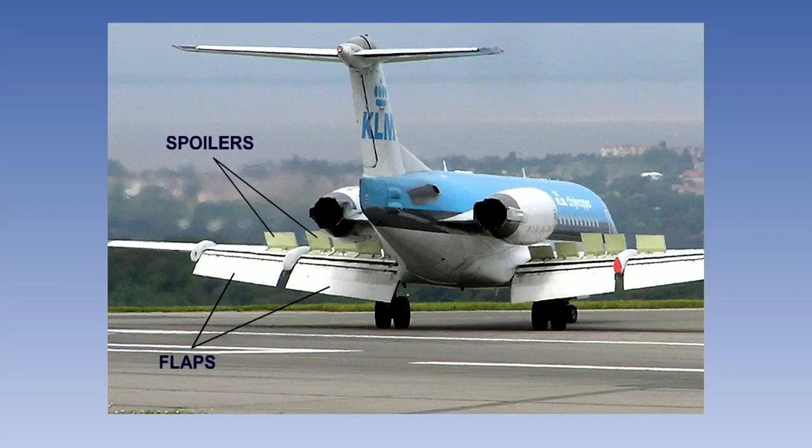The secondary flight controls consist of lift augmentation devices, flaps and slats, lift dumping devices, spoilers except when they are used for roll control, and air brakes and trimming controls. Some or all of these devices may be fitted to a particular aircraft.

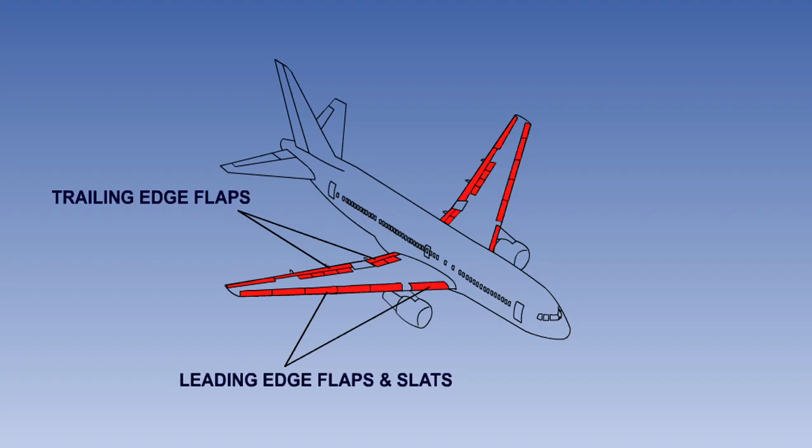In this lesson, we will look at the operation of trailing edge flaps, leading edge flaps, and slats. The purpose of trailing edge flaps is to increase the lift generated by the wings at low speed. They are normally only used for takeoff and initial climb-out, and approach and landing. They produce a lot of drag, so it is important that they can be retracted when not required.

There are various types of flap design which all increase both lift and drag in varying amounts. A full explanation of the aerodynamics of trailing edge flap operation is outside the scope of this lesson. However, here is a brief summary of the most common types. Click on a flap type to view its properties and operation.

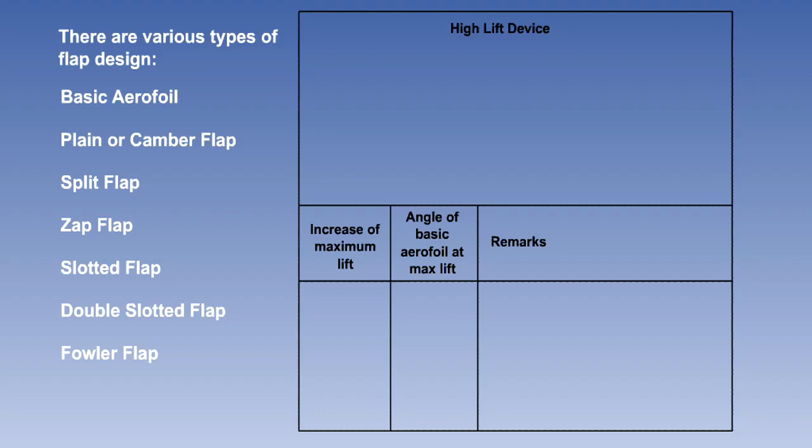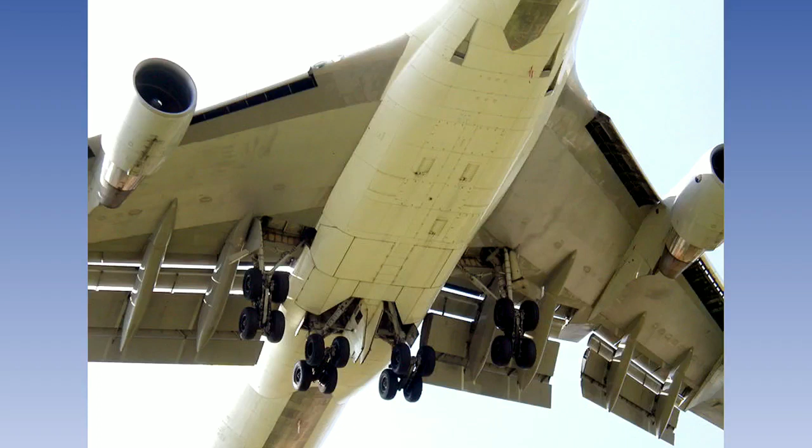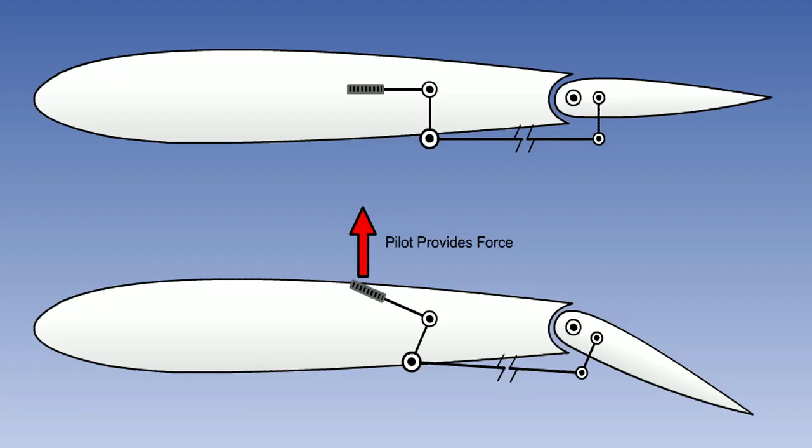In a typical system, there is a flight deck selector lever. On light aircraft, this is mechanically connected to the flaps. But on larger aircraft, it will either be mechanically or electrically linked to a flap control valve.

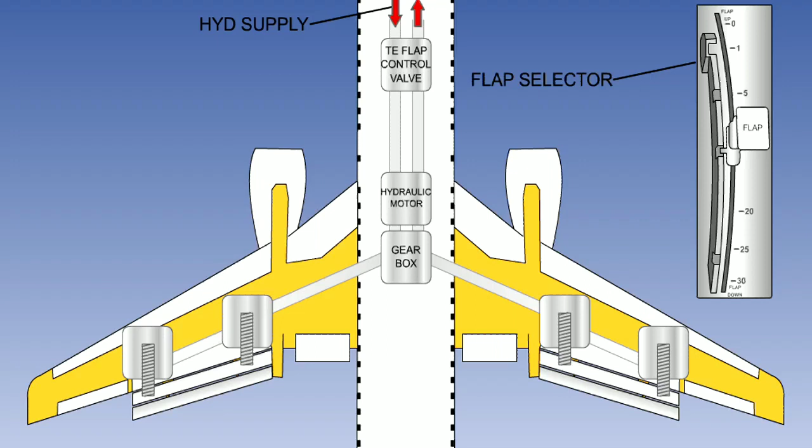The flap control valve controls the flow of hydraulic fluid to a flap drive unit, which consists of a hydraulic motor and a gearbox. The motor drives a transmission system, which moves the flaps. In the typical system shown here, the motor drives the gearbox, which rotates torque tubes. They operate right-angle gearboxes, which in turn drive screw jacks to move the flaps.

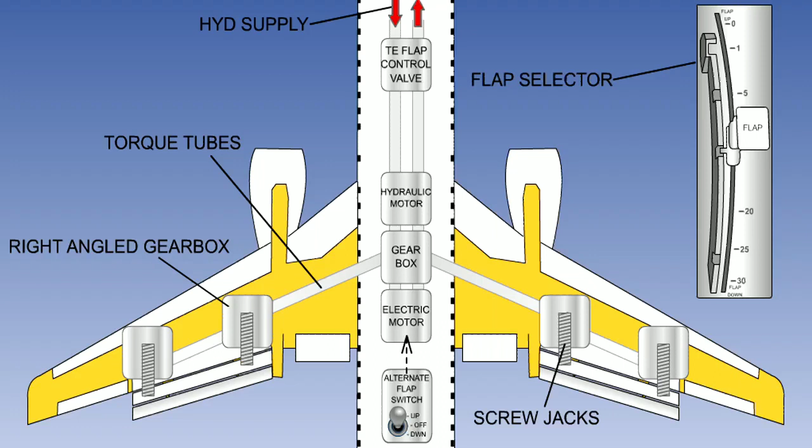If either the hydraulic supply or the normal control system should fail, then a backup system, using either an alternate hydraulic supply or an electrical motor to drive the main gearbox, can be used instead.

The system is monitored and controlled by a control computer. This computer looks after trailing and leading edge flap sequencing, as well as monitoring the system for malfunctions.

If the flaps operate asymmetrically, and by that we mean the flaps on one side move out further than the other, the control computer will instantly stop the movement by shutting off hydraulic fluid to the motor and either closing a bypass valve and hydraulically locking the flaps, or operating brakes on the drive shafts.

Similarly, if the flaps move without the lever being moved, or they overshoot the selected position, then again the computer will shut off the hydraulic supply and lock the flaps.

The computer also receives airspeed information. If a flap selection is made at an airspeed above the maximum permitted airspeed for the selection, then the computer will not allow the flap to operate until the speed is within limits. Similarly, if the aircraft is accelerated above the limit speed for the current flap position, then the computer will cause the flap to retract to a safe position. This is known as the Flap Load Relief System, or FLRS.

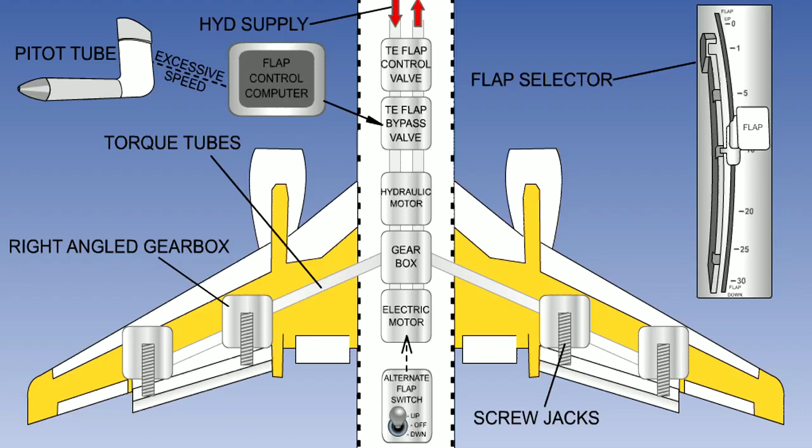Wing leading edge devices may consist of slats, Kreuger leading edge flaps, or variable camber leading edge flaps, or some combination of these.

The Boeing 747, for instance, uses Kreuger flaps on the inboard section of the wing leading edges and variable camber flaps for the outboard, while the Boeing 737 has inboard leading edge Kreuger flaps and outboard slats. Whenever a mix is used, the Kreuger flaps will invariably be fitted closest to the wing root.

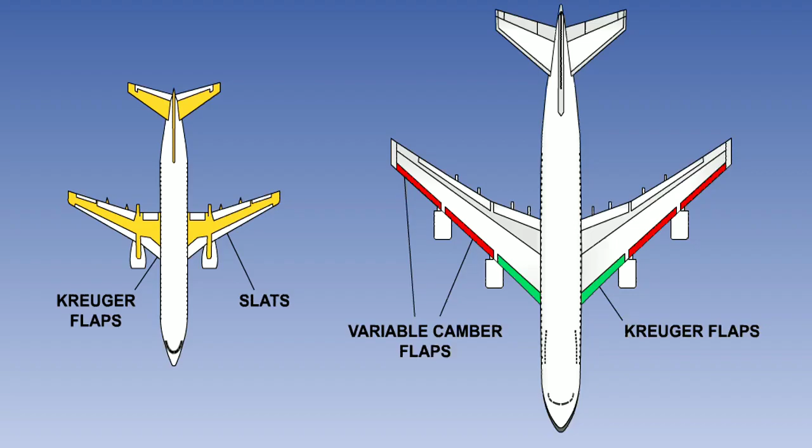Leading edge flaps and slats are operated by hydraulic power or by air turbine motors, and are normally sequenced to operate with the trailing edge flaps.

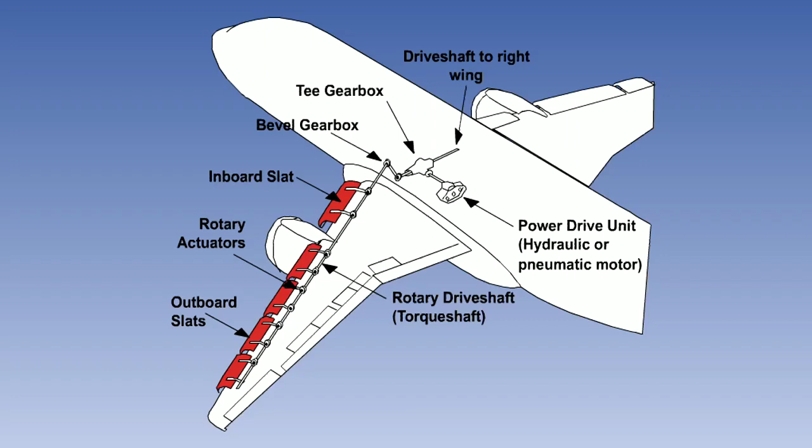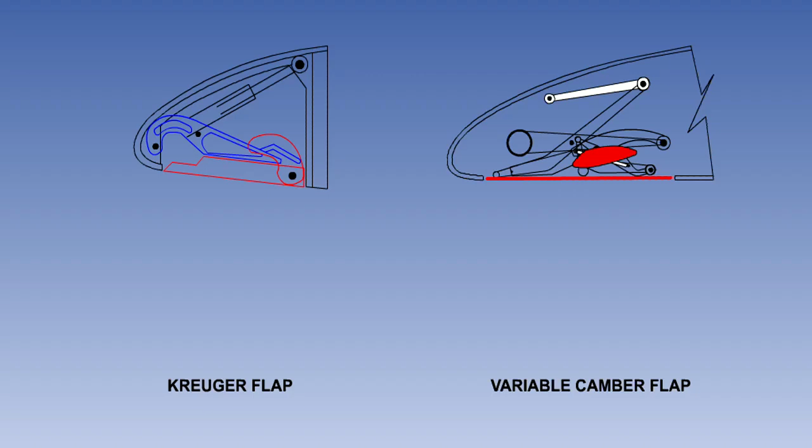Leading edge flaps are hinge surfaces that extend by rotating downward from the lower surface of the wing leading edge. They only have two positions, retracted and extended. The Kreuger and the variable camber flap look the same from the outside when retracted, each simply a flat panel on the bottom of the wing.

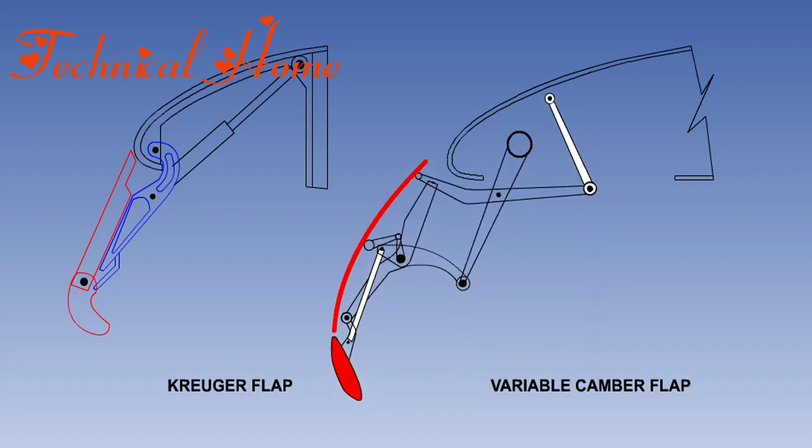When the Kreuger flap extends, the panel maintains its flat shape. The variable camber flap, on the other hand, has a cam system which bends the panel into a curved aerofoil shape as it extends. The panel returns to its flat profile on retraction.

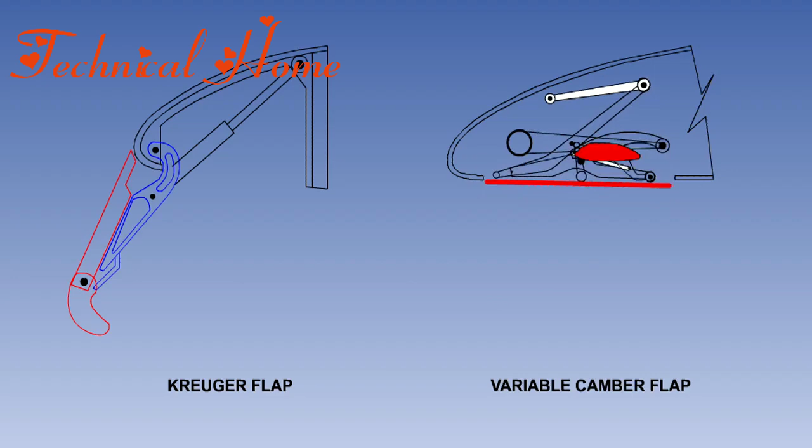Slats are sections of the wing leading edge that extend forward to an intermediate position to form a sealed leading edge, or they can extend fully, forming a slotted leading edge, depending on the trailing edge flap setting.

The leading edge flap or slat extension sequencing varies with aircraft type. On the Boeing 737, the leading edge flaps extend fully and slats extend to the midway position when the trailing edge flaps extend to their first position. And when the trailing edge flaps are fully lowered, the slats extend fully. The sequence is reversed when the flaps are retracted.

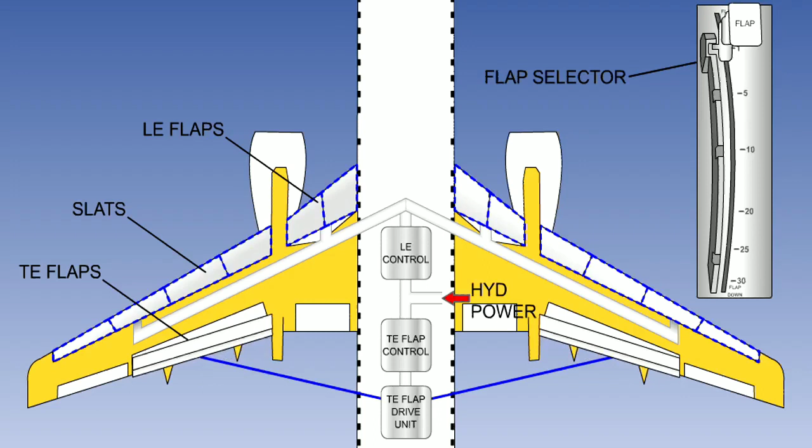Whatever extension sequence is used, the leading edge flaps and slats will normally be retracted when the trailing edge flaps are retracted. Alternate operation of the leading edge devices may be by a standby hydraulic system, or, in the case of those powered by air turbine motors, an electrical standby system. Depending on the aircraft type, it may or may not be possible to retract the leading edge devices by the alternate system.

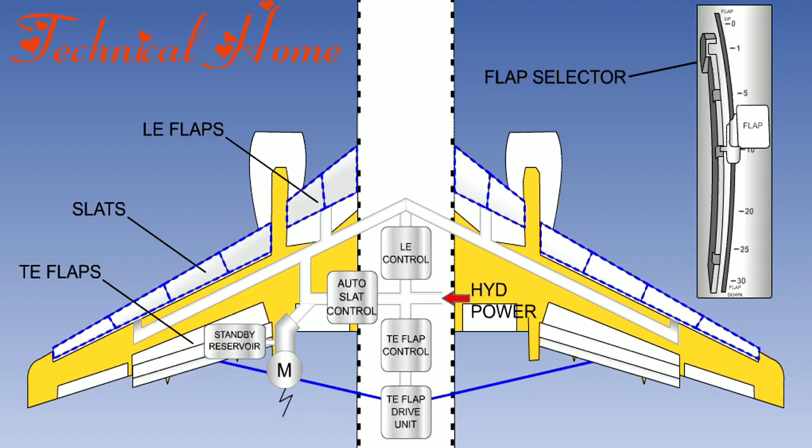Some aircraft types have an auto-slat system, which will automatically extend the slats from the intermediate position to the fully extended position if the aircraft approaches the stall angle of attack and the slats are not already fully extended.

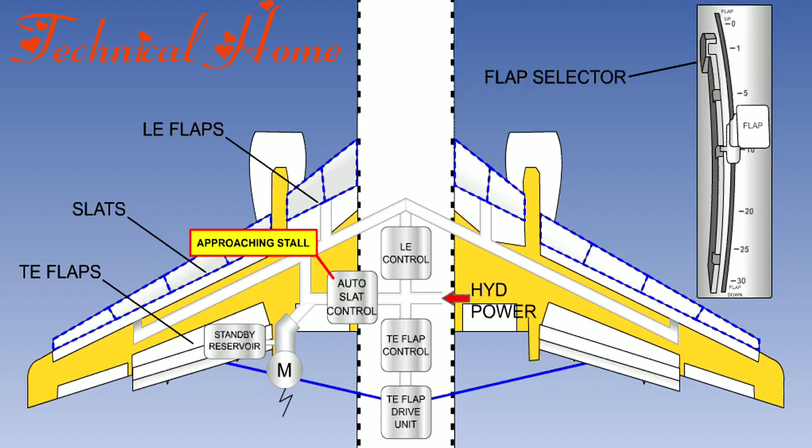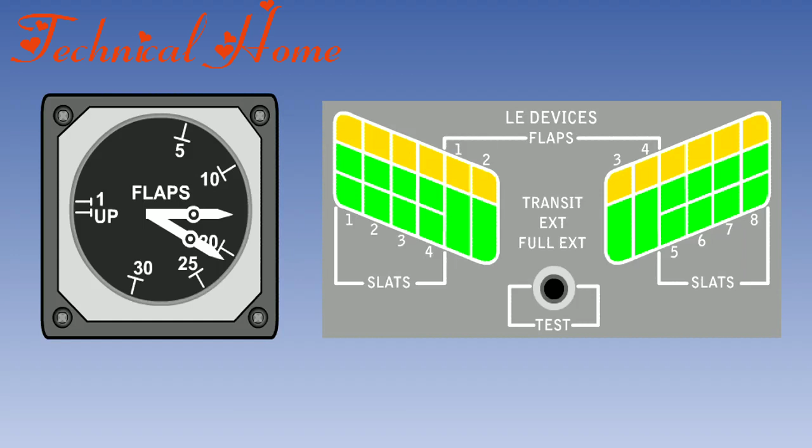The trailing edge flap and leading edge flap or slat positions are displayed on the flight deck. On older aircraft, this may be a simple double pointer gauge, as shown here for the trailing edge flaps, with the leading edge flap and slat positions being indicated by coloured lights. On more modern aircraft, the positions may be displayed on an electronic screen.

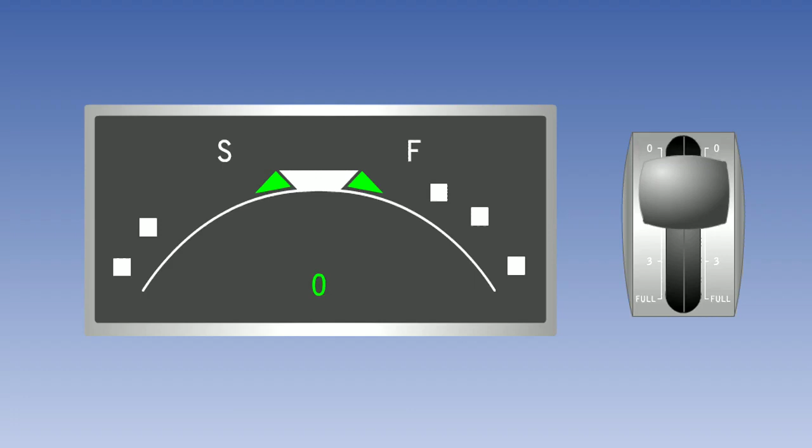As seen previously, the electronic display is able to provide a lot of information. In this Airbus system, the selected flap position is shown on the indicator. When the flap lever is moved, the new selection is displayed in cyan. It will change to green when the flaps reach the selected position, and in the event of a fault, it will change colour to amber.

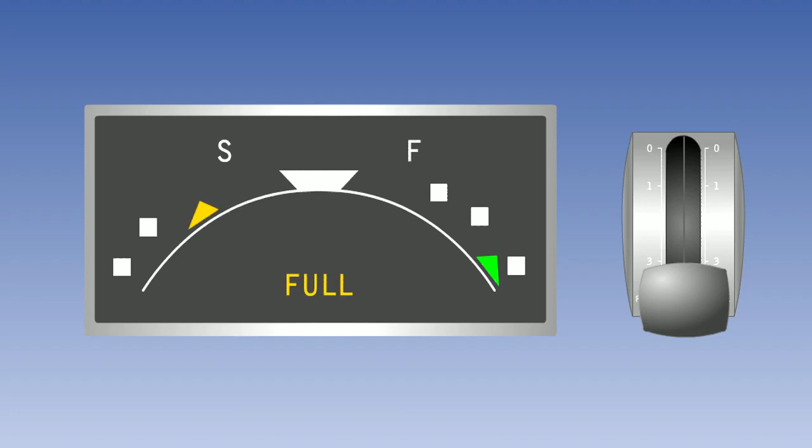That is the end of the flaps and slats lesson. Here are the main points from the lesson.

Light aircraft usually use plain or camber trailing edge flaps, while large airliners use hydraulically operated slotted Fowler flaps.

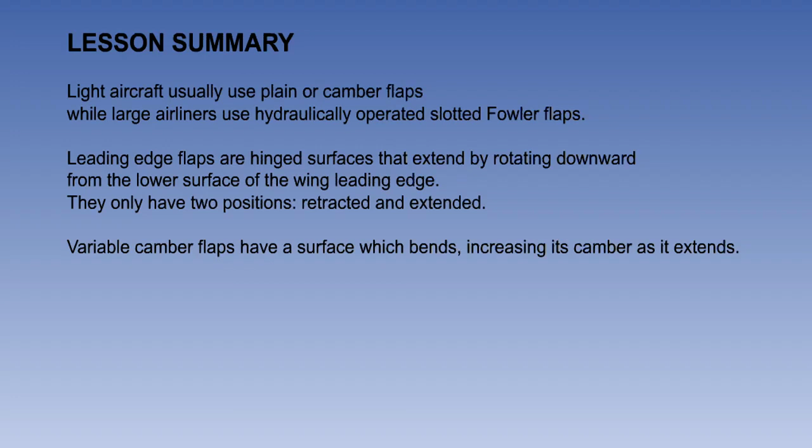Leading edge flaps are hinge surfaces that extend by rotating downward from the lower surface of the wing leading edge. They only have two positions, retracted and extended. Variable camber flaps have a surface which bends, increasing its camber as it extends.

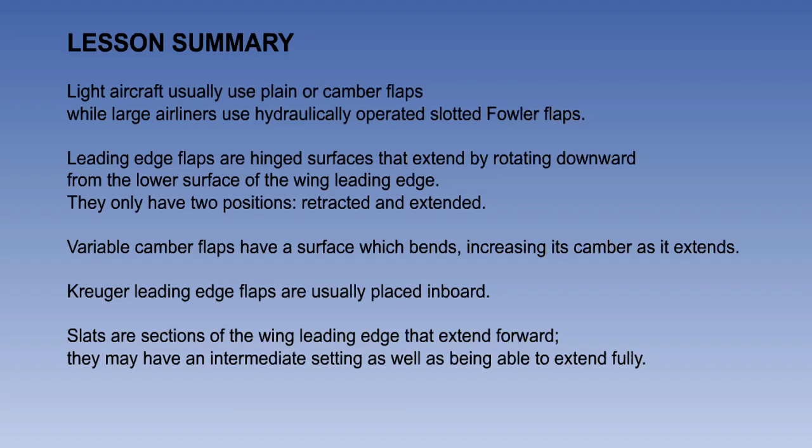Kreuger leading edge flaps are usually placed inboard. Slats are sections of the wing leading edge that extend forward. They may have an intermediate setting, as well as being able to extend fully. The leading edge devices are normally operated either hydraulically or pneumatically.